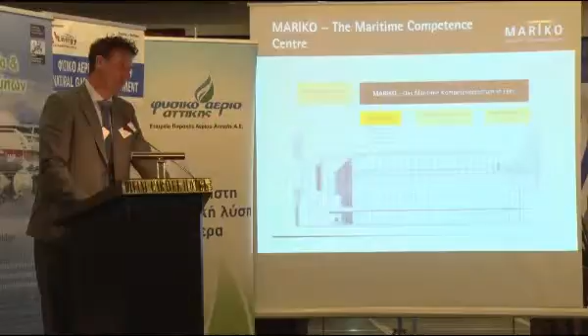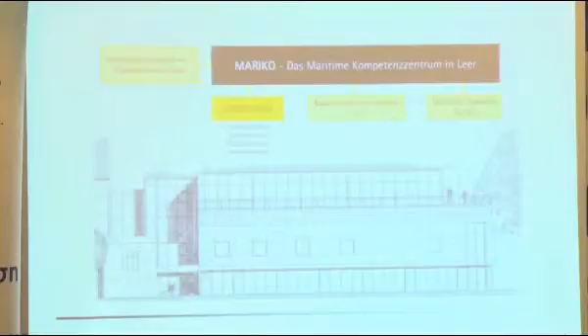Something about the building - it's only stones. That's the building in Germany. And the governments in our countries give us the opportunity to do this job, not because they love LNG or something else, but because they love that we create jobs in our country, in our area. Jobs are the most important thing which we will work out. And LNG and creating jobs - that's maybe something you didn't discuss this morning or yesterday, but that's our main target.

I don't like a lot of text.

My presentation is about how we are creating jobs, how we are connecting companies to universities, and how we deal with this LNG thing. It starts with creating our network.

I'd like to tell you a small thing about how that works. Then we start with pilot projects. We talk with companies, they invite us to talk about their plans. After that, I would like to tell you something about

the success of this working method. The success is that there are a lot of ships at this moment which we are building with LNG. I'd like to show you some of the new ships and the ships that are already built and sailing now for a few months.

I would like to tell you something about two harbors in our area. One is the harbor of Harlingen, in the northern part of the Netherlands, which sails with ferries to our islands in the North Sea. The other harbor is quite different, with other ships. I'd like to tell you something about volume and bunker perspectives for these two harbors with two different ship types. And then, in my opinion, how a bunkering solution works at this moment.

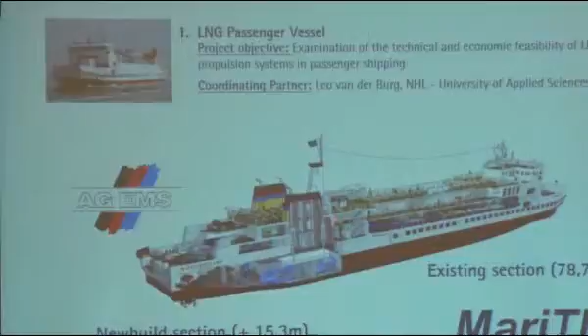And they had the luck, of course, that they got some extra funding to work this out. This is a major conversion, that means it's actually a new build. This is new, and this one is old. So sorry, how is it new? One part is new and the other part is not new. This is the old ship, and they cut it in two halves, and they built the back part of the ship new. The engine room is the new part.

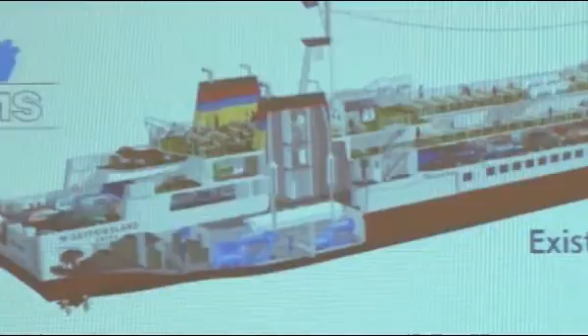No, this is really here - they cut it into pieces. Yes, this old part was thrown away. And they built a complete new one with the new technology - new engine room and propeller, all the other, everything. Not only that, also all the accommodation. Every piece of steel, every exhaust system, every engine, everything new. So actually it's not a conversion, actually it's a new build.

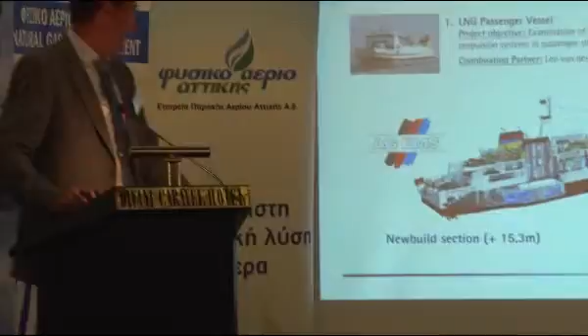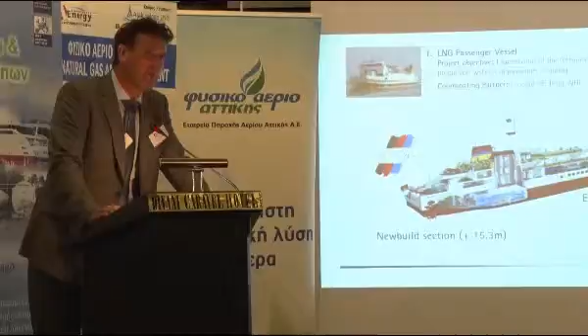And the question was, what kind of technology is possible in our ship? And of course, if you choose dual fuel - in this case they chose, after our study of what is the best solution, a dual fuel engine - because in 2011 I guess in the Netherlands only 4 people knew something about LNG. So if you make at that moment the decision to go further with LNG, it's of course quite good that you have a redundant concept. If everything goes wrong, you can always use MGO because of your dual fuel technology.

Now new partners, sailing to other islands, choose for example lean burn, 100% LNG, not with diesel.

But the concepts are really complex, and that's what's really important. If you go on with this technology, you have to build knowledge in your research institutes, but also in your companies. If you don't have knowledge, you're not a good partner. For example, the class society overrules everything if you don't have knowledge. So you must have knowledge to have good answers to your class society, otherwise your ship costs you a lot of money.

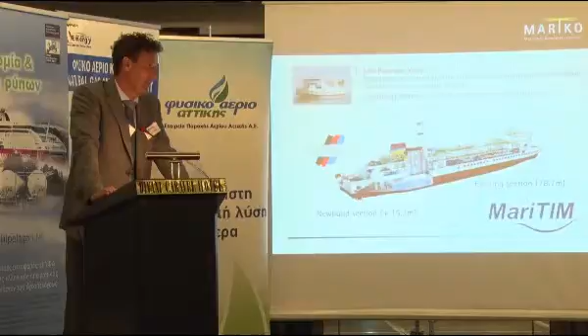So this you mean that in the construction of the parts of the machine, all of this new part, it was in the shipyard of your area? Yeah. And all the materials and everything of this technology is coming from your area? Yeah. And the engine is from what company? We have two lean burns from Mitsubishi and 2 dual fuel engines from Wärtsilä. And they are in a dual fuel gas electrical propulsion system, so that means 2 Schottel propellers with electrical engines, and the electricity comes from the generating of 4 engines.

And what is difficult for this shipbuilding company in Germany? The project management and the project know-how was the difficult part, is the difficult part. Too little knowledge, you don't get this project management in a good way. Because Wärtsilä has a lot of know-how, Mitsubishi has know-how. Then you have the complete electrical platform, it costs 900,000 euros.

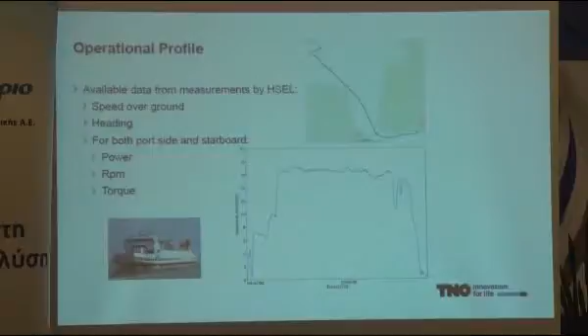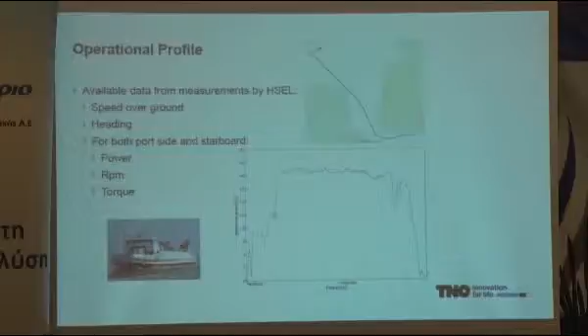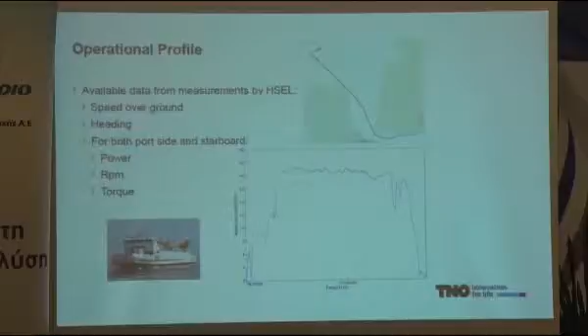I don't want to talk too much about the research, because otherwise it's a long story. But the nice thing is, students of this university are really interested to do, for example, measurements on board. They measured the old ship completely, every consumer, every engine, they measured everything. They also measured at this moment the new ship, and they make an analysis between the old and the new. And that's really nice, to involve students in these kinds of projects.

And that's also what my chef discusses with me, is also, okay, you have a nice job, but my students are the most important thing. So involve students in your projects.

Can I ask you a question? What was the part of innovation in this particular ship that had added value compared to the already existing LNG, for example, the Norwegian ship? What was the part that had the added value? The innovation was, of course, that it was the first ship. If you said, okay, was it new technology? No. Wärtsilä makes a lot of engines, Mitsubishi makes a lot of engines, but nevertheless, the funding was not because of this innovation, but of this cooperation.

And on the other hand, every euro in this project is spent well, because every company learns how to use all these technologies. And that's why they get business at this moment, and that's why we get a lot of new work in our area. So it's not rocket science.

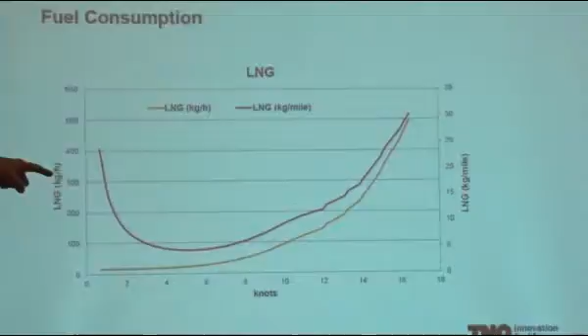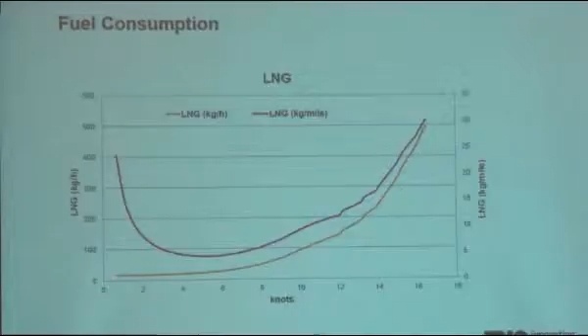Students make a lot of analysis together, because students are nice, but always under supervision of a research institute, for example. In the Netherlands we have TNO, maybe you know TNO, comparable with CERTH I guess. But then you get good quality, because students must deliver good quality in time.

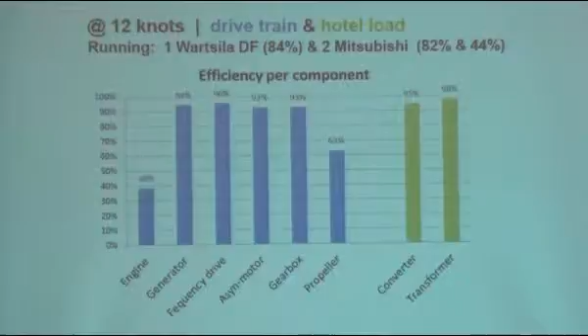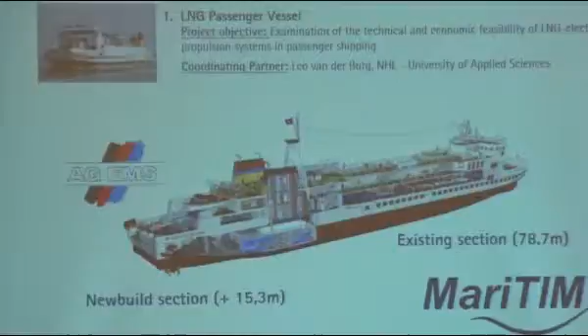One of the discussions for this ship was about time constraints. Another discussion was that this ship has electrical propulsion, and everyone said electrical propulsion costs you efficiency, costs you money in the end. Why do you want it?

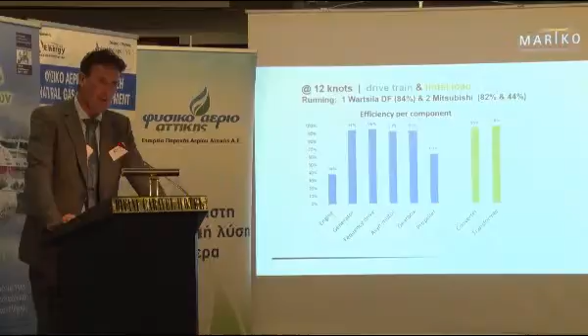Electrical propulsion costs you, in the end, energy and money. But in this case, because of the intelligent power management, which reacts to moving through the sea, the tide, the depth, every parameter, it's more efficient than direct mechanical propulsion. And we can prove that.

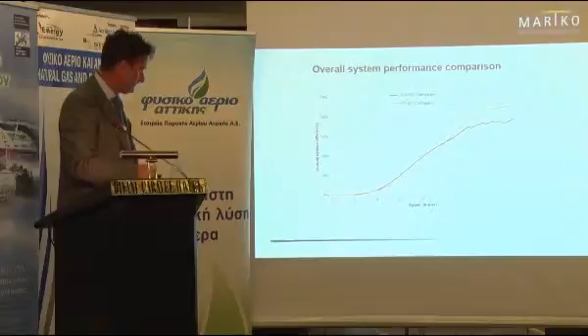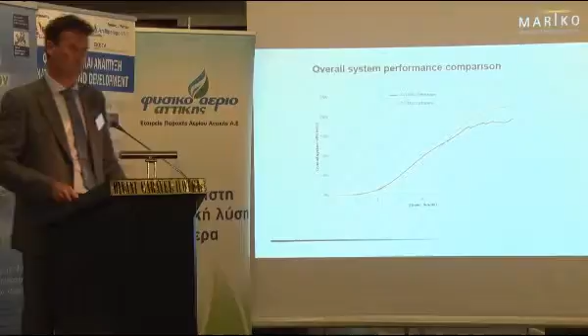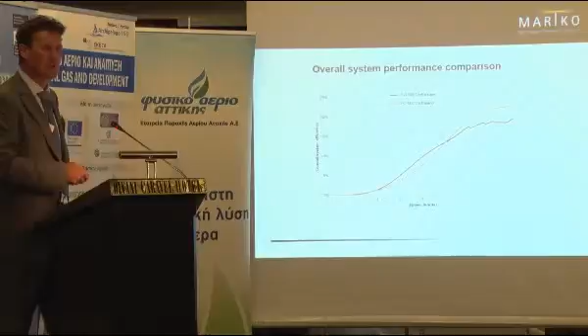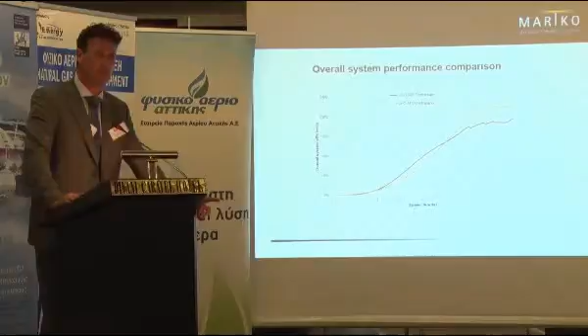This is a graphic showing that the blue line is direct mechanical and the red one is electrical. You see that at high speed, direct mechanical is more efficient. At lower speed, when big engines don't have to perform at 100%, the electrical platform is more efficient. What we studied is how to move this crossover point to the right side, and that's what happened — that's why this ferry is more efficient with the electrical propulsion system.

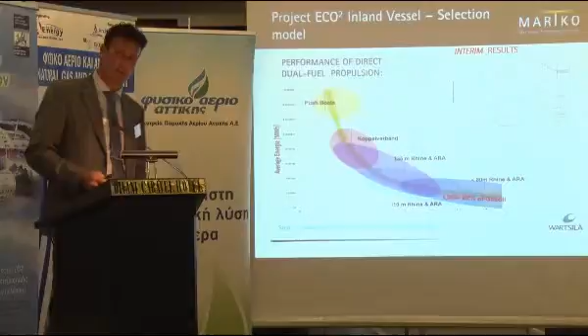But that's a really difficult study. This is an example from my colleague in Wärtsilä, because Wärtsilä also did some parts of our project — they handled the project management of the inland vessels. I'd like to show you some of those ships later on.

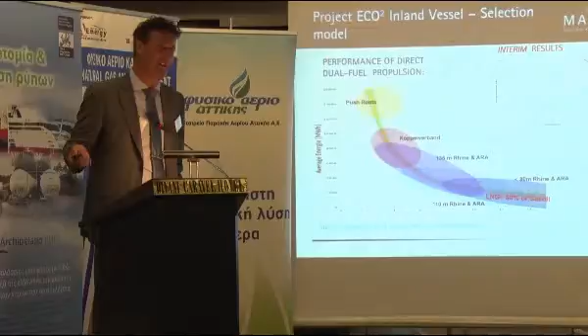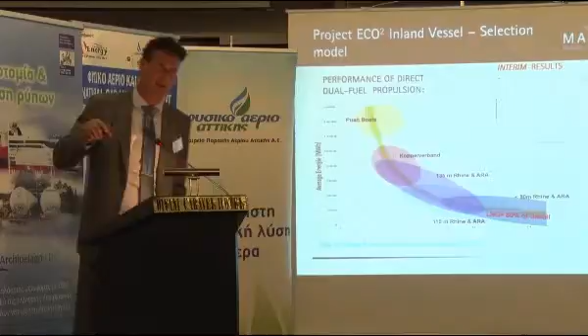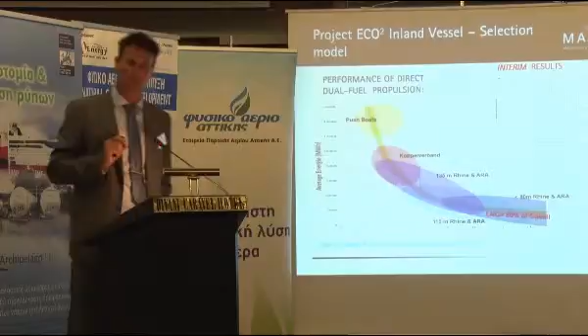Of course, if you use a lot of LNG, you earn more money. That's easy, because the more LNG you use, the more money you save compared to MGO, due to the price gap between the two fuels. At this moment there is no gap between the two fuels, which is why some vessels with dual fuel engines currently sail on 100% MGO. That's of course not why we do this, but the price of oil is so low right now — though that will change.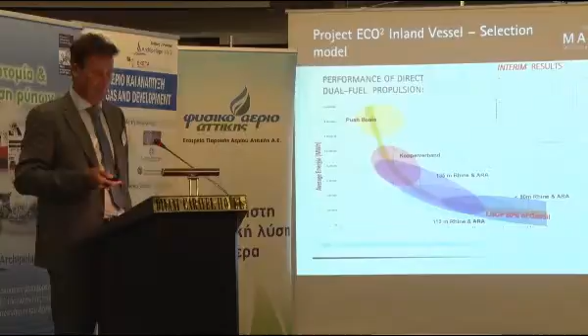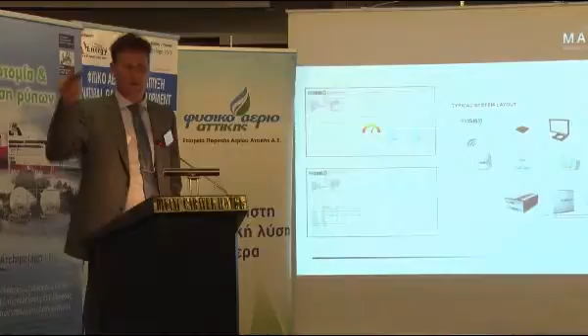This is the monitoring system we built into this ferry. We collect all the data on board the ship, send it to the cloud, and receive it on shore, comparing it with bunkering data. We're now getting the first information about how much money you save compared to the older ship. So data monitoring, knowing what you're doing, is really important.

What's happening at this moment in the northern part of the Netherlands: these are the first two ships of Shell, built with Scania engines in an electrical propulsion system — Scania LNG generators, fabricated. These are the first two, and I guess Shell will order 30 of these ships within a few weeks or months. Thirty.

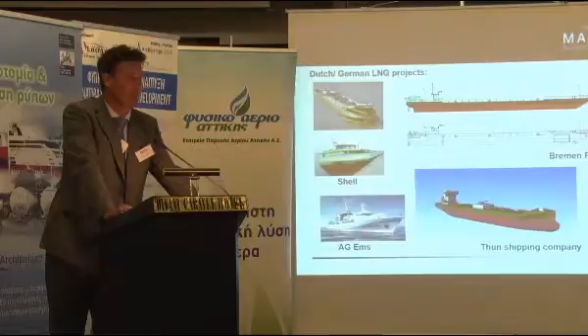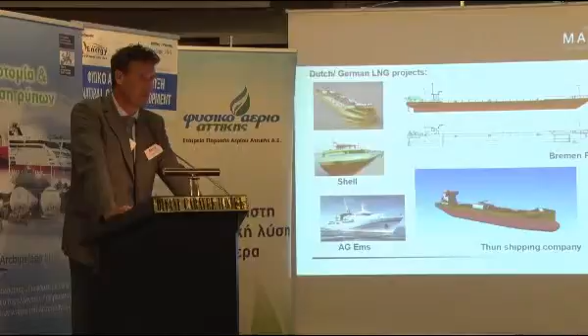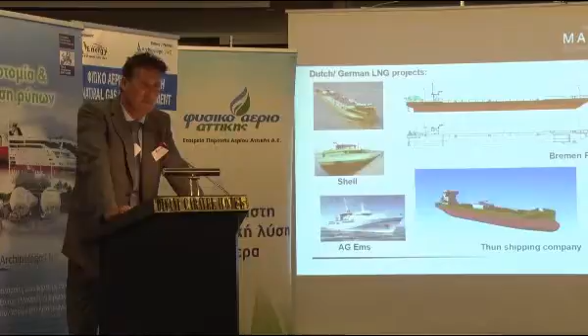A lot. So that means the market will change if these big oil companies choose LNG as a fuel. It's a really big influence on our inland waterway systems, and that will be positive because of our LNG infrastructure. So the market is really moving, really big.

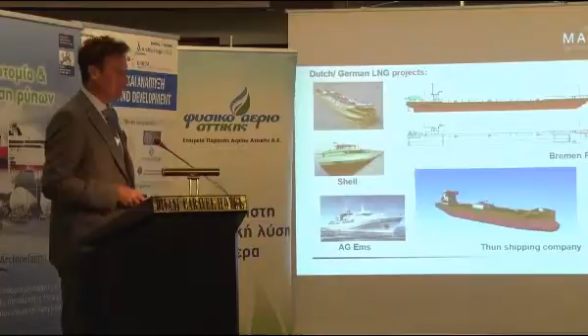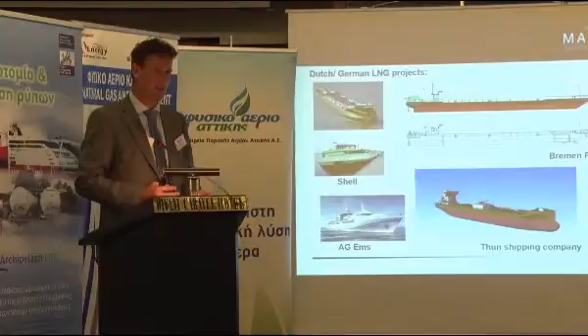I guess it's too much, but what we're seeing at this moment is that after these first pilot projects, the market is really moving now — tugs built with LNG, dredging vessels with LNG, ferries with LNG, tankers with LNG, container ships with LNG, all built in the northern part of the Netherlands or northern Germany.

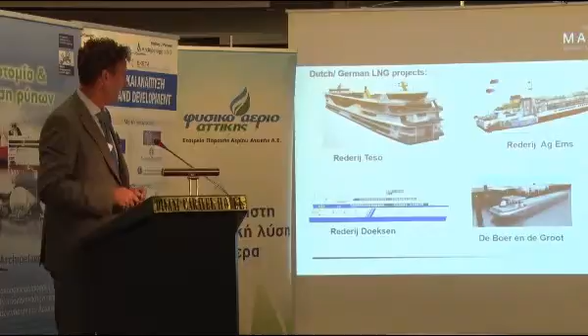This ship is built in Spain. That's the first CNG ship in the Netherlands, sailing to one of our islands — CNG, compressed natural gas, because the sailing area is only 15 minutes, and then we're back for the whole day.

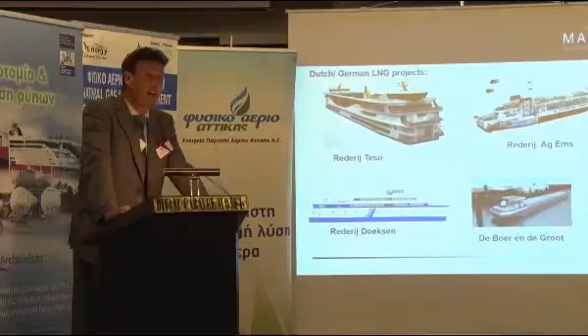Why did they choose CNG? Because they had gas on their island, and they built a compression station to get compressed gas. So having a tank compressor on the island was easier than bringing LNG trucks to the ferry on the island.

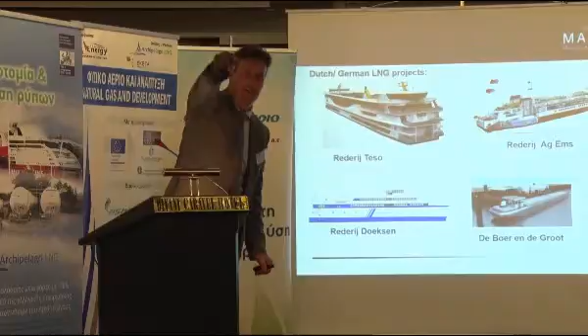Sorry, how much distance is there between the two ports, 15 minutes you said? Fifteen sailing minutes, like Piraeus to Aegina for example, 15 minutes. Ah, it's Salamis — Salamis Perama. If you're here in the harbor, you can get there — it's really short.

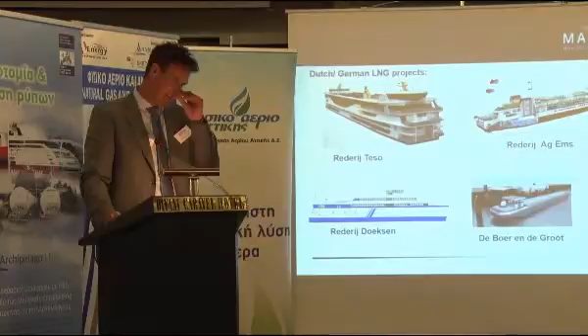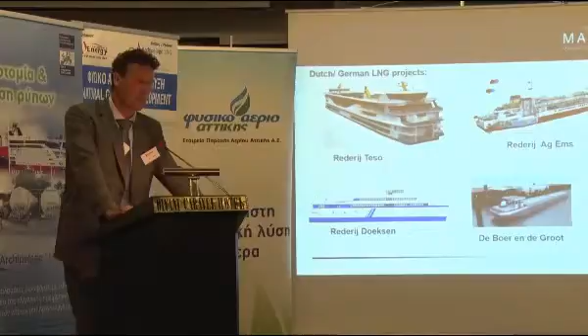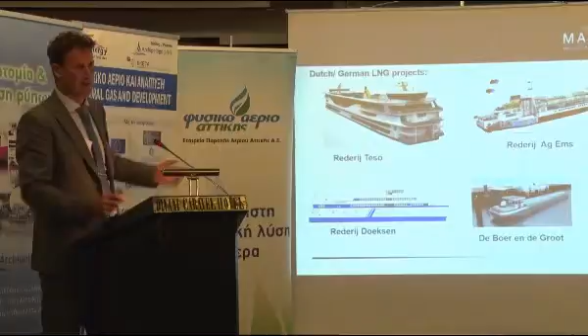CNG — we also have to deal with education, because our university also delivers the trainers. So we provide the trainers for the crew, and CNG is really difficult when it comes to training, because it's not described in the regulation. In my opinion, these big tanks at 200 bars of compressed natural gas are something else.

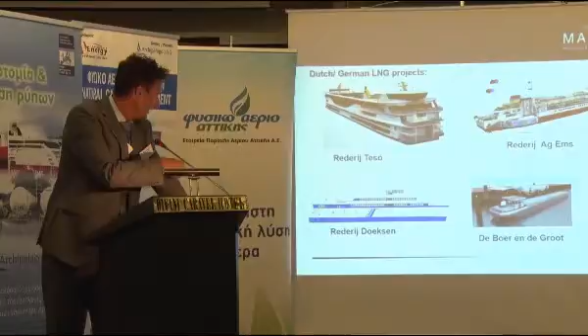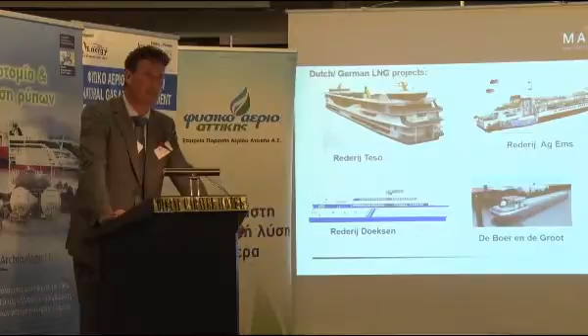This one is the neighbor island, a Dutch island. This ferry owner decided to choose 100% LNG, meaning no dual fuel engines on board, and I guess they chose Mitsubishi engines in a generator situation.

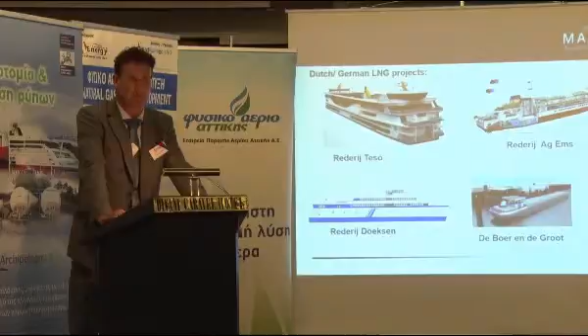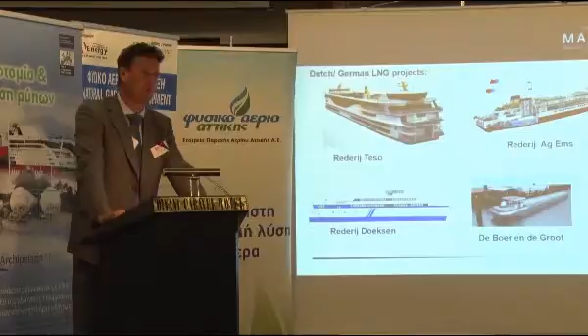The question is whether it's possible to have a direct mechanical solution with these Mitsubishi engines. I guess that's what it looks like at this moment - in the near future the first ship could also be a direct mechanical lean burn Mitsubishi propulsion system. That's new, because at this moment no ship has a direct mechanical lean burn propulsion, only the Bergen engines in Norway.

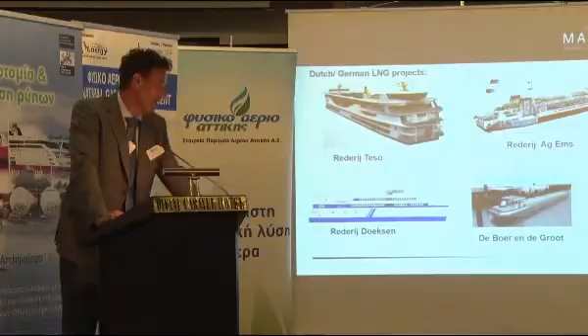So that's new, and that's also what MAN is doing at this moment, and also MTU. They develop new lean burn engines with a more dynamic profile than the older lean burn engines, so diesel really has a concurrent now in this LNG.

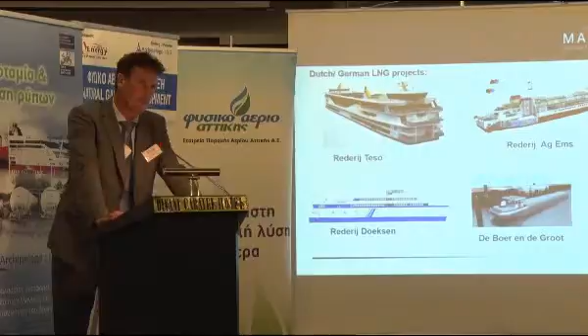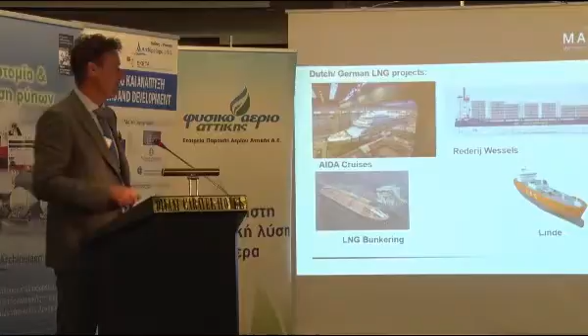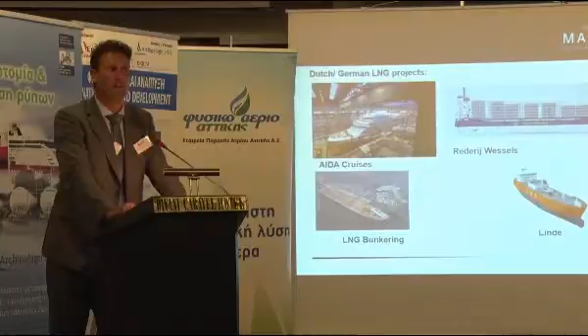Okay, what also is a nice part - this is the Meyerwerft in Germany, which makes really big cruise ships for AIDA, for example. And they decided to build cruise ships 100% on LNG, and that's really a new thing in the world.

So they ask us now, with an expert group, to think about bunkering solutions, for example when our ships are in Spain or in Greece. So things are happening, and when these big companies decide to go further with LNG I really like that, because if I see these big cruise ships, you only see the smoke, and that's changing.

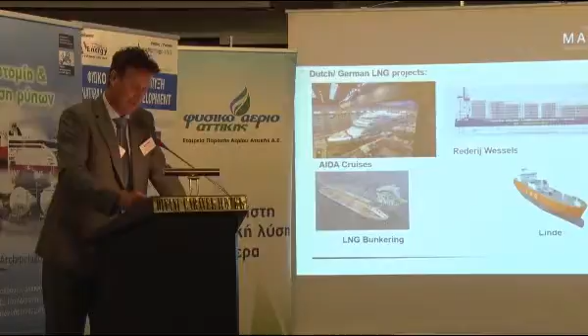And this company has a solution with LNG, but they are also really involved in hydrogen - hydrogen energy, hydrogen fuel cells. They store hydrogen, but they're not using it at this moment - they want to use it in the future.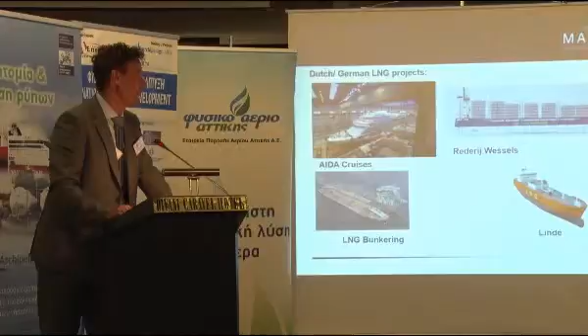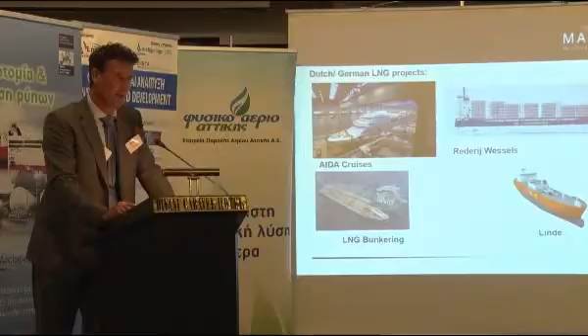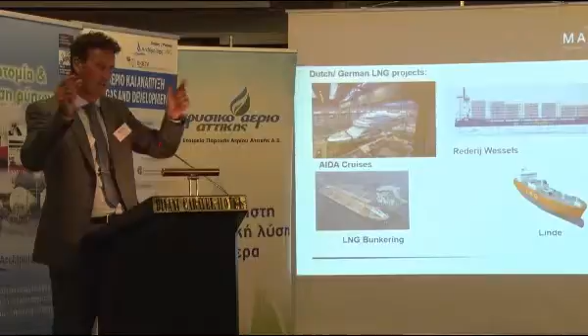And the nice thing is that this company is about 15 kilometers from our German partners, and we have them in our technology steering group. So we do a lot of things with technology, but we also have really good partners to discuss whether it's the right direction for your innovation project.

Okay, the last thing I want to say is about our two harbors. We have a lot of harbors, but I have two as examples. This one, Harlingen, is a harbor close to where I live. Near Groningen - Groningen is nearby, everything is small in the Netherlands so 80 kilometers is a lot. And this German harbor, Wilhelmshaven, is a completely different harbor.

And what we do is the harbor invites us to have a chicken-egg discussion. So we have a workshop about chicken-egg, and we call the workshop 'chicken egg, it's over' - so no more discussions about chicken-egg because there is no issue. That was the workshop, and here is an overview.

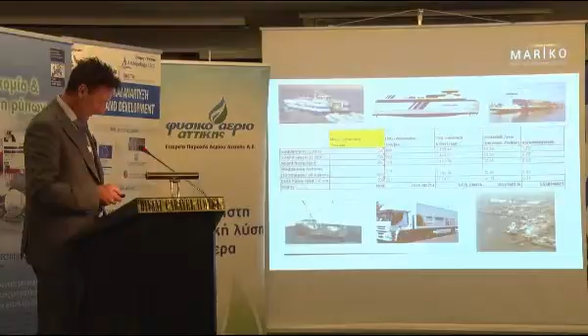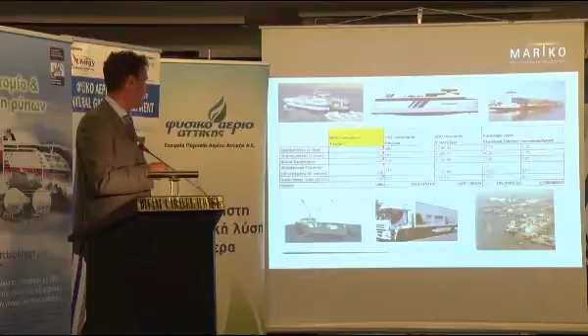If you talk about the first movers in these harbors, they are the ferry owners. This is a conversion of a ferry, and this is a new build of a catamaran. They develop new ships with less weight, and less weight also means less weight of LNG on board.

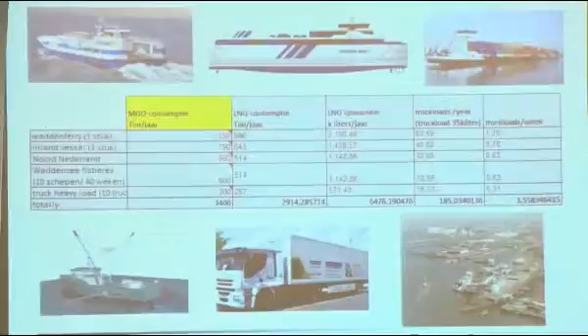This company said, okay, 7 cubes of LNG is enough, so I want a bunker solution for 7 cubes every 2 days - they need a flexible bunker solution. Our government is also a partner in this discussion, and they said we will fund this new bunkering solution if you make sure that this bunker pontoon is built in our area.

Then we will fund this, independent from the LNG deliverers - so no Linde or Shell or GDF is involved in this project. Only local companies who build infrastructure on the demand of this company.

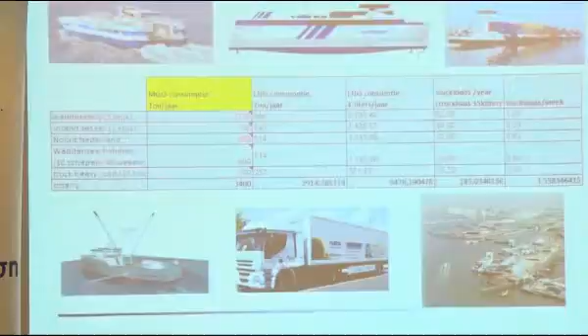If you look, fishing ships are interesting. Trucks - we have about 250 trucks in the Netherlands who use LNG, not compressed, LNG. We also have compressed natural gas, but about 250 trucks use LNG as fuel.

So if you make a calculation about 1 ferry, 2 ferries, an inland vessel, 10 fishing ships - these ships have 300 horsepower, it's a fishing boat for the Wadden Sea, and they can only use engines limited to 300 horsepower, so they're really interested in a standardized LNG solution. If you calculate all these ships, you need 3.5 truckloads every week.

This scenario is maybe possible for the first 3, 4, 5 years. Building an infrastructure for 3.5 truckloads isn't possible, because 3.5 or 4 trucks each week is nothing. These trucks come from Belgium or Rotterdam and drive to the Netherlands with a truckload of 40 cubes or 35, and 4 truckloads is nothing. So you have to start with trucks and then see what's happening.

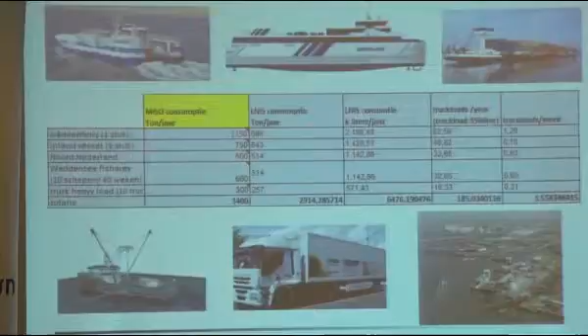But the nice part is that they start with building ships, and the truckloads are always available, so it's no problem to get them, and there are no risks.

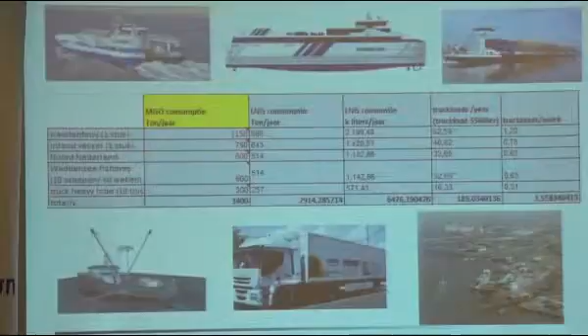If you look at the bunkering solution at this moment, one of the companies in the area makes a bunkering pontoon, a modular bunkering pontoon. They start really small with this solution, a small tug with a small tank, making a modular concept. When the volume is increasing, they can easily put more tanks on the pontoon. It's a really cheap solution.

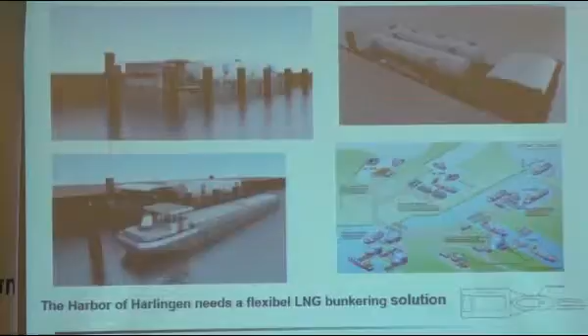We worked out this solution in our project, and our government said, okay, if it looks good and the companies can build that, we will fund it. That makes it possible for this harbor in the northern part of our country for these things to happen. And then it's interesting for fishing ships to go further with LNG, with trucks, etc. So it looks very positive this way.

Wilhelmshaven at this moment has 2 ships that can possibly bunker in Wilhelmshaven. This is a ferry who sails to Helgoland, a small island in the neighborhood of Denmark, and these bigger ships that come from Norway and sail to Wilhelmshaven and back.

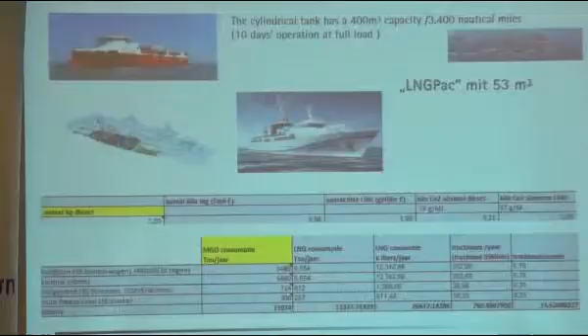If you look at these truckloads, there are 15 trucks each week. That means 15 trucks in the harbor. That looks like more, maybe too much. That means it's not possible to bunker one ship with 1 truck, so you need 4 or 5 trucks. And that's not a nice view if you need 4 or 5 trucks for your ship to bunker.

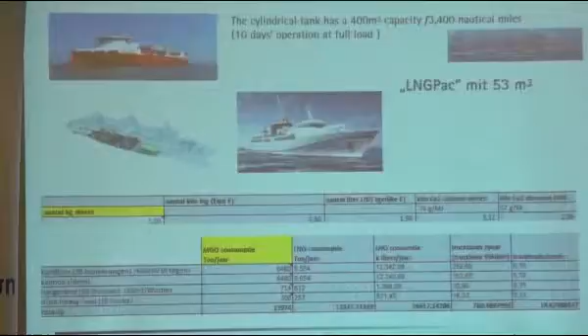So that's a harbor that needs another infrastructure. They need a small scale station. If you look at these small scale stations, a truck investment costs you about 200,000 euros, which is enough for the harbor of Harlingen. But a small scale station like this costs 800,000 or 1 million euros.

And a bunkering ship costs, of course, much more. The positive thing is that at this moment, 3 ships are being built as bunkering ships: 1 from Lindegas, 1 from Shell, and 1 from GDF Suez. So within 1 or 2 years, these ships will be ready.

They have a minimum of 500 cubes. I don't know exactly, but this money comes from GDF Suez. I asked them, okay, give me a real price perspective.

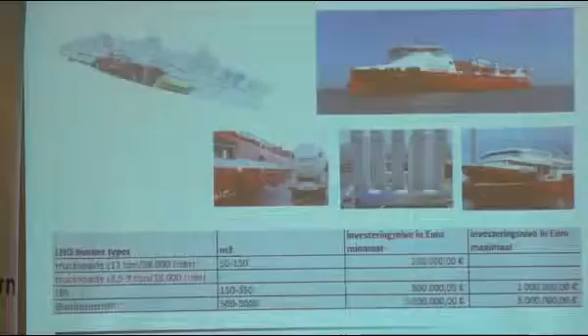That means 2 harbors need different solutions. Yes, different. And in the Netherlands, you see that the government is really involved in fighting for their local companies, and that's a little bit of a different situation in Germany.

My last slide is actually about the bunkering of the first ferry in our Wadden Sea. It's a bunkering situation with Lindegas, who delivers a truckload every 6 or 7 days, loading about 35 cubes of LNG to this ferry in 1.5 hours, and it's actually without problems.

And that is my story about LNG. So it's no rocket science. In the Netherlands we said learning by doing, and that's really what we did. Thank you.

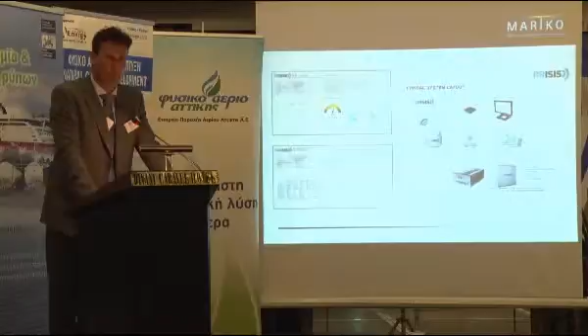So we learn because we get all the data in the database, and we know how many kilowatts, for example, we are using at this moment in a real life track. And yeah, it starts now actually, because the electrical platform, the ship is sailing now for 3-4 months, but the complete system is not working as it should be.

So they're engineering on it at the moment. The follow-up system is not working completely. Now the ship is not working the right way, because the management of all these systems, all these engines, these 4 engines, the supervising of an overall electrical platform is really a hard job, and harder than we expected. So too hard actually.

It looks easy, it's no rocket science, but a lot of engineers have a lot of problems with it. But in 2-3 weeks it's ready, and then the electrical platform with these 4 engines will function as we planned, and then the monitoring system can also start generating the real consumer data.

So you built the application for this cloud storage. You built this application for the monitoring. Yeah, and in the next project we go on with this, and then with real monitoring of the emission.